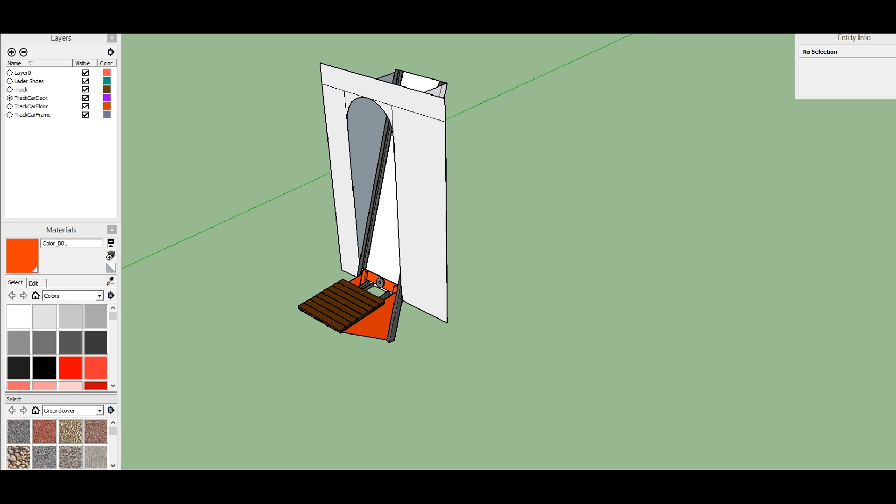I've got SketchUp pulled into the screen. Let's dive into this. As you can see, this is the solution I came up with. This is just a model of that portion of the hull. It's been a while since I've been down there, so I just kind of guesstimated on the dimensions of everything, but this looked to be pretty close to what things actually were, maybe just a little bit off.

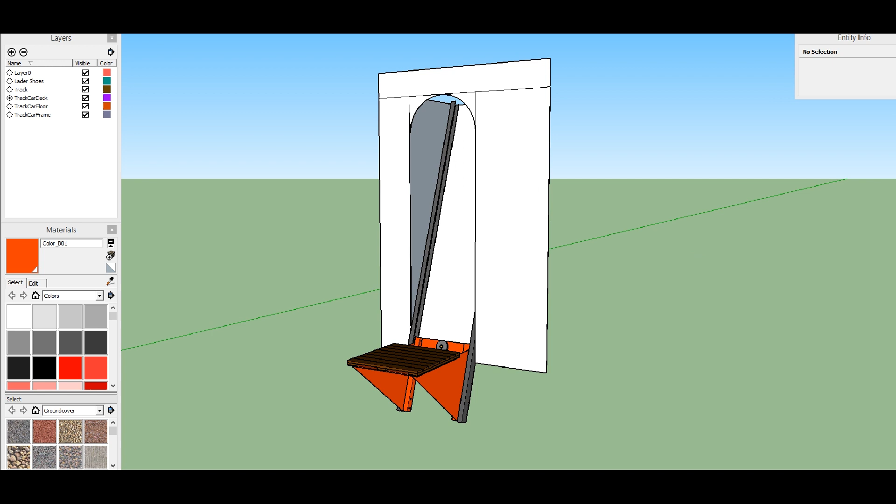But there's a couple of things you're going to have to think of when doing this. I know right now you've got the rounded top on that and everything. I'd be a little bit worried about building a guillotine up here, where you can see my finger pointing. So what I'm looking at is what I figured on.

You've got the two pegs where the ladder goes right there. Well, I was thinking just take a piece of 4-inch by half-inch flat stock and run it over to two pieces of box tubing. You could have a really nice low-profile car that way, and you can see there's almost no depth to that thing.

I did put a pulley here in the center of it, and the reason for that is you want to have that pulley because you want to have the line run down and then come back up. You want to get that double line pull instead of just having one line pull this thing. It gives you a little bit better mechanical force, makes the thing move a little slower, makes it safer. Anyways, I designed that with the pulley in here.

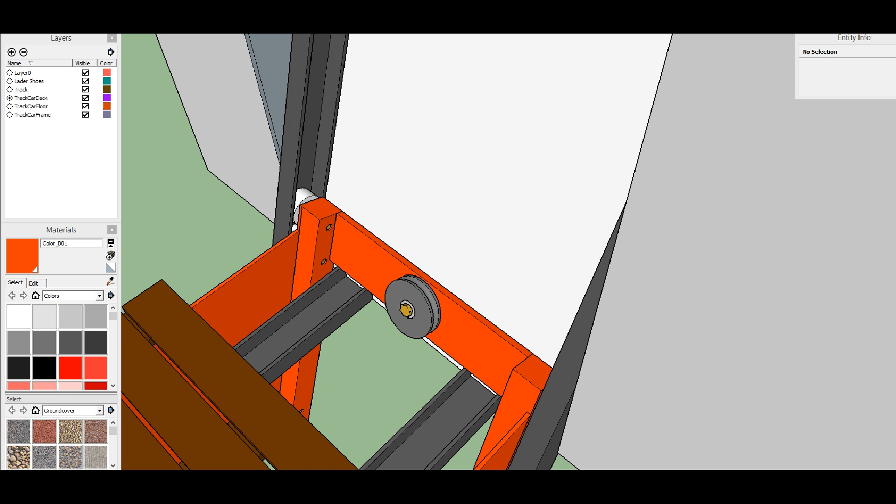You can see then this is just a piece of 1/4-inch plate on each side that comes off of that 2-inch box tube. There are 8 wheels on my design, and the reason I did 8 wheels was when you start talking something like this where it has a real twisting force to it, you have a whole lot of force at play there, so you need those wheels to be able to really support.

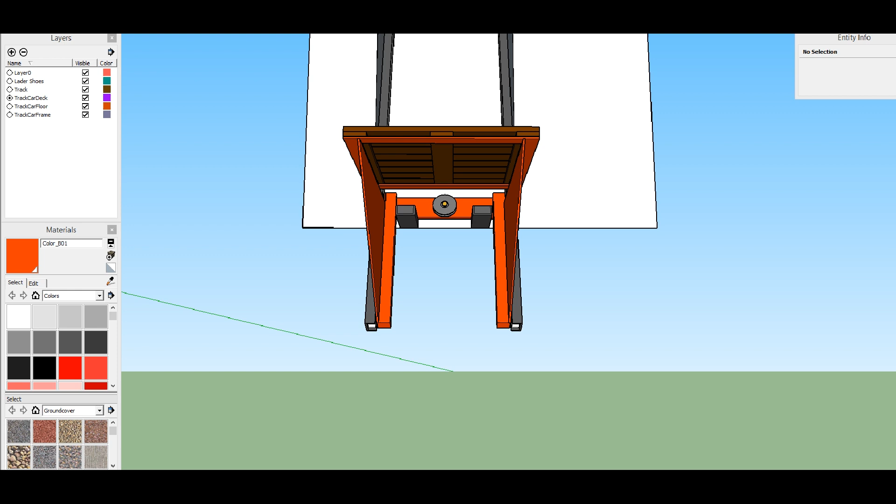And you're talking some pretty serious forces on those things because of the lever you have there. With this setup here, I'd feel comfortable with those 8 wheels on there. I'd feel comfortable putting a couple hundred pounds on there.

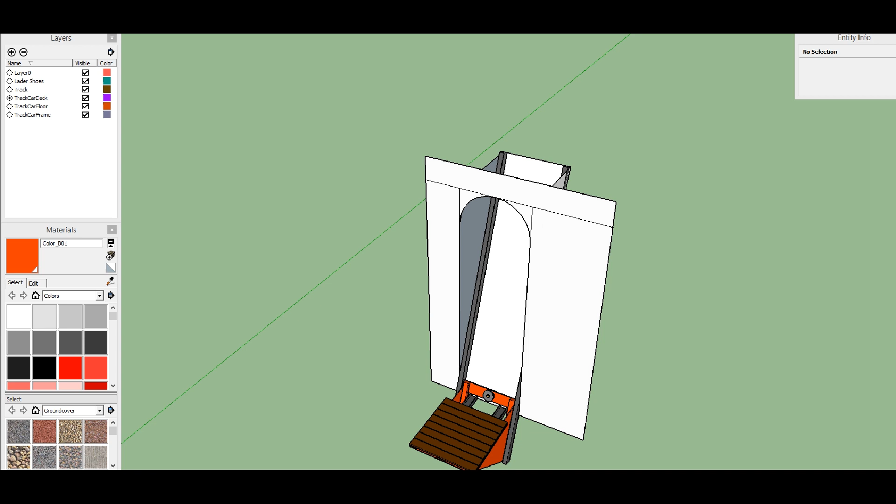And I actually think in doing it this way, especially with the little pulley setup there, if everything at the top here was rigged right, you could possibly put a little tang that went down in the middle just to drop this down lower. But I think doing that, you could have an elevator that comes all the way to the top where it's actually just pretty much flush with the top deck, or very well close to it, for whatever it is you're going to use this thing to bring things down to the bottom with.

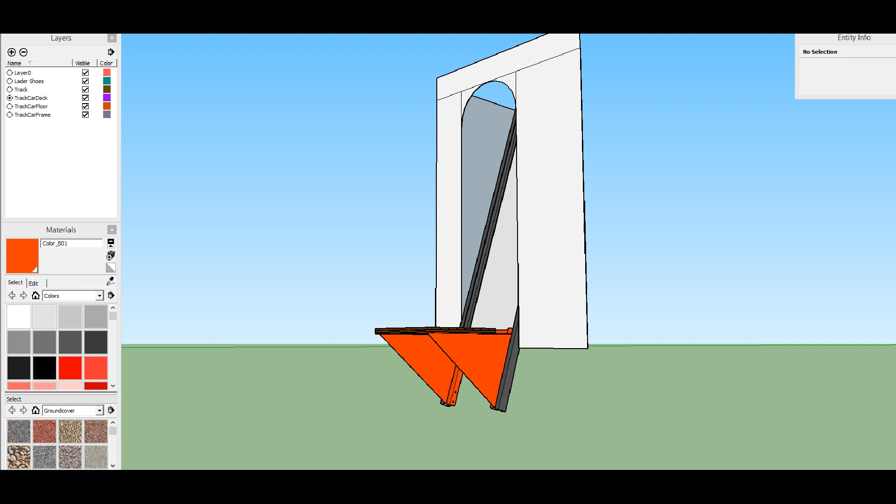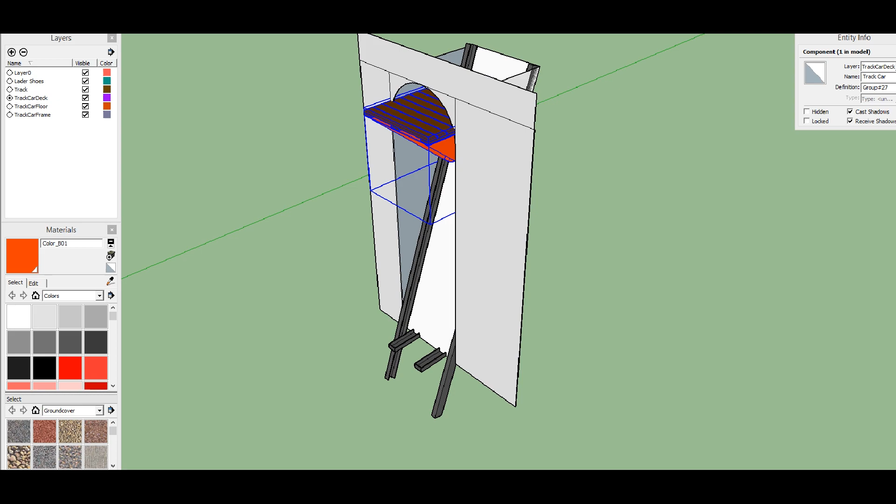The big thought I do have is at the top here, you're going to have a serious issue when it's time for this deck to come up here. Let me select this and move it up to the top so you can see what I'm talking about. We'll put our point on the rail about right there, and then grab the rail as we go up - you can see as it starts to go in, I'll move it all the way up to the top of the rail here, basically right there. You can see it's going to collide with the top of that, so that's something to be thinking about - how long your deck here is going to be. That's my big concern, that as you get into it, you'll actually have problems with your headroom, not with the thing clearing the ladder.

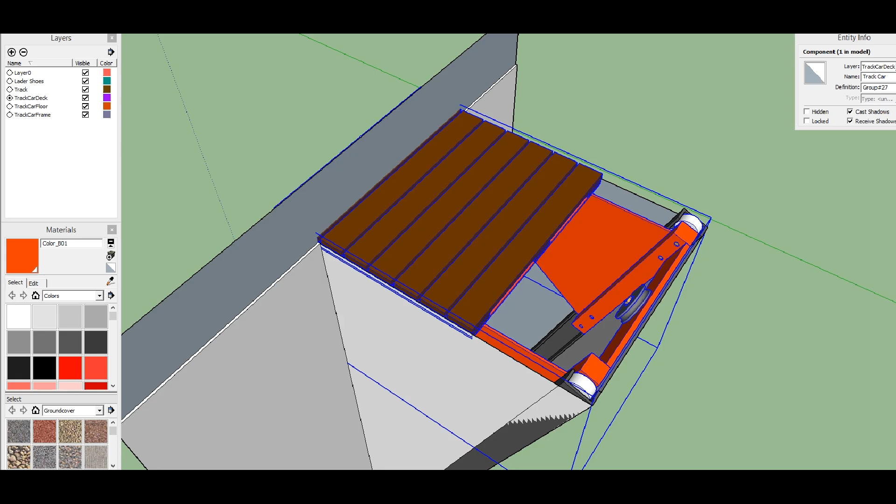To make this thing functional, you may have to take the ladder out of that well. If you did that, I could see one of those Ipe tiles just sitting on top there acting as the deck, running up and down, no problem. But that would be my bigger concern in using this thing - it might not function very well with the ladder in it, just because of the space it has to come out there. This could be moved back some, and there's some playing around you could do with it. But those are the types of things I would worry about, and you may just have to pull the ladder out to use it. I don't know how all that's going to play out.

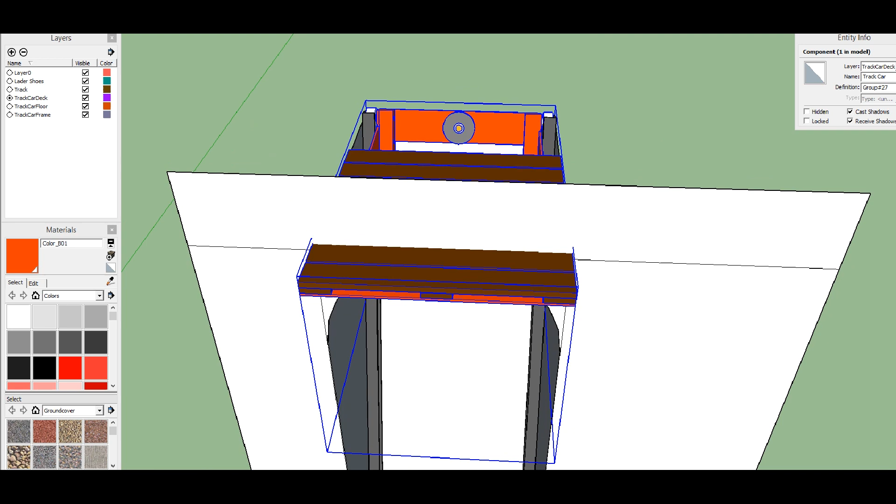But hope this gives you an idea. I'll give you just a couple more detailed shots here. I'll turn everything - the track, ladder, shoes, and layer 0 - off so you can get an idea how this thing looks. As you can see, it's just a frame that's designed to work over the top of those shoes.

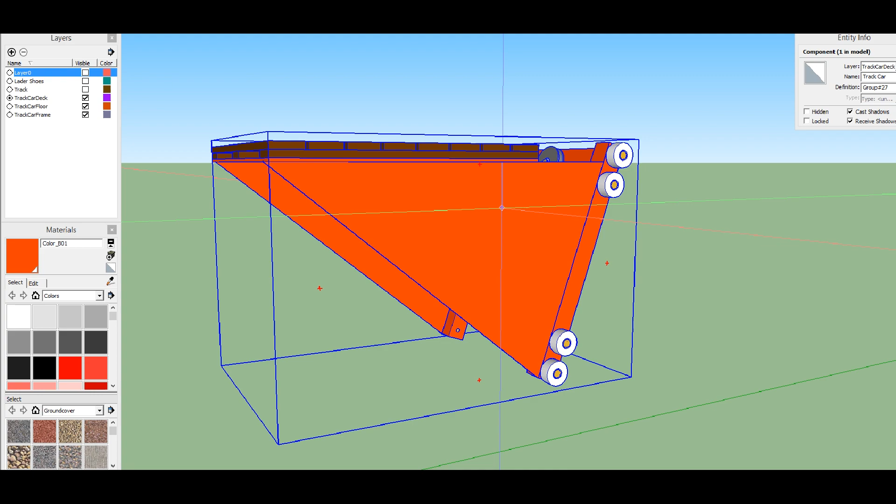You want this thing to be heavy. Anytime I've dealt with something like this where it's cable driven, you want good tension on the cable and it'll actually be self-riding. If you wanted to, you could add a set of rollers here and here just to keep the thing centered in the track, on the bottom and maybe at the top. I really don't think it's necessary. It's something you may consider doing, or you could put a roller on the face like you were talking about. That wouldn't be terribly hard with this setup either. Actually, I think a roller on the face would probably be easier.

What I do believe the issue is going to be, though, like I said, is that overhead clearance. This is pretty simple to build, not terribly complex. Using 2-inch box tube, I was figuring you drill it out all the way through, weld in one of those long nuts you've been using on the floor pieces, a 1/2-inch bolt goes right through the center of it with the wheel and the bearing. I think that would work really well.

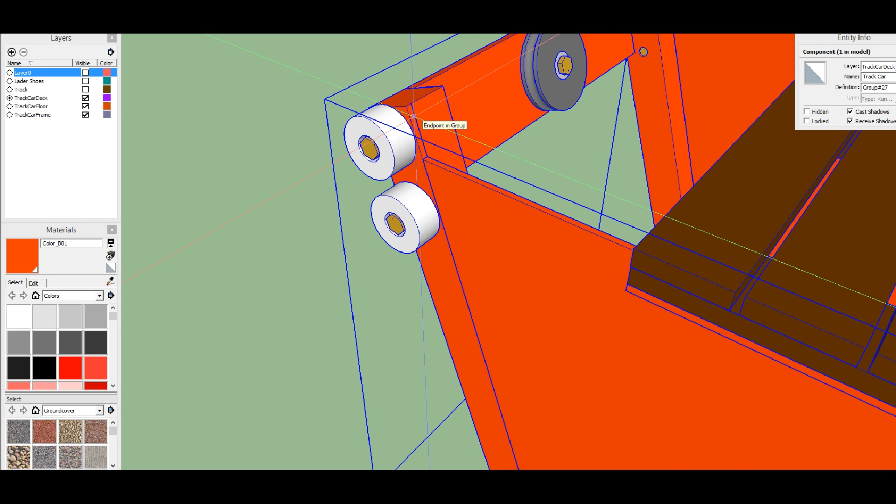Ipe tile for the deck piece, I just designed that - we'll shut that off. I used a frame of 2-inch by quarter flat bar to make the deck surface there, nothing fancy, bolted right down to it, and it'd be pretty simple to put together. Anyways, I hope this helps you out. We'll catch you later.